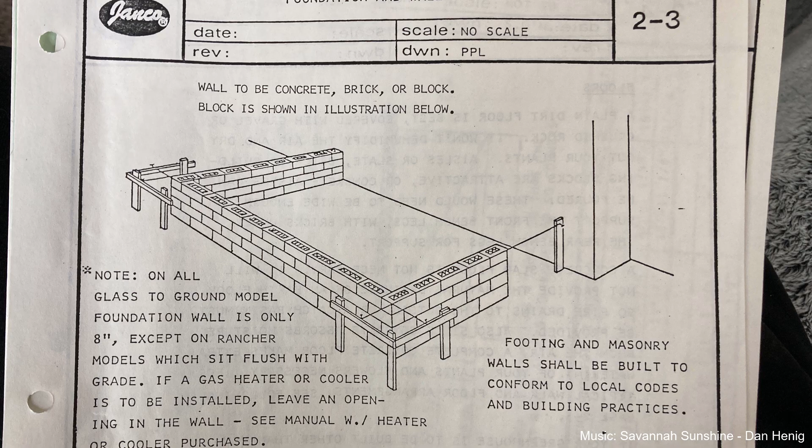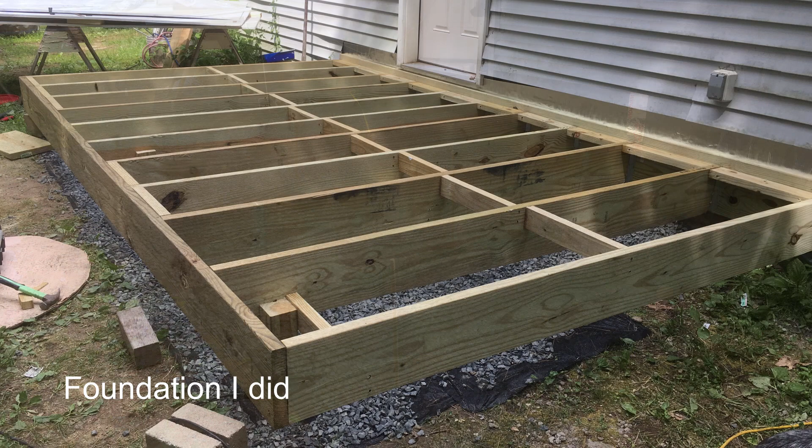The first thing we need is a foundation. The instructions required a poured concrete foundation, but the place I wanted to position the greenhouse had the water line underneath it, so that wasn't an option for me. So I went ahead with sonotubes and built a deck-like structure to mount the greenhouse to. I even got a little helper to help me.

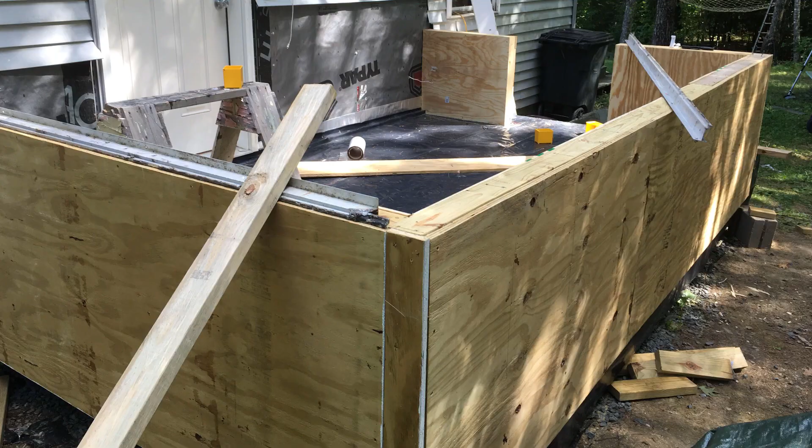I built 2x4 walls and insulated them with fiberglass insulation. I sealed that with tar paper, and I plan on vinyl siding it.

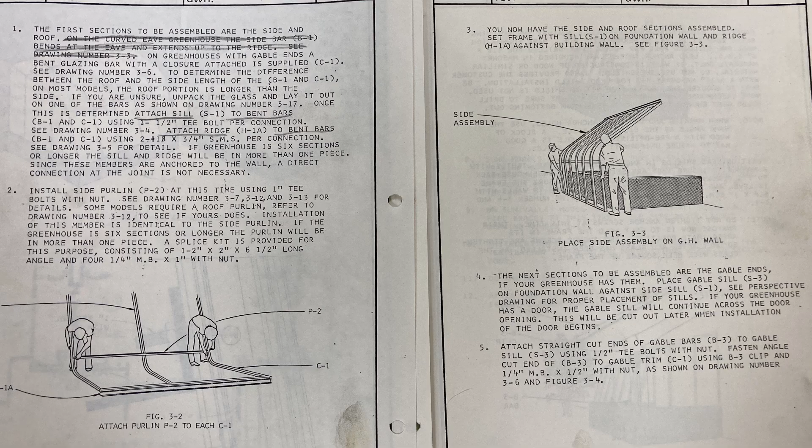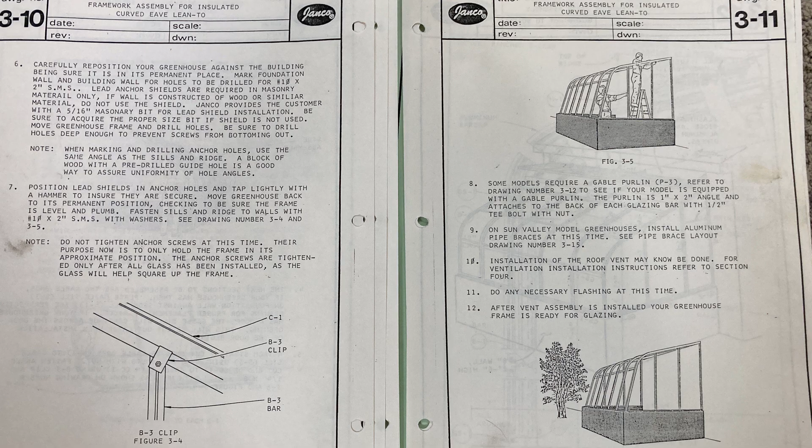Here's some of the important diagrams on how the actual structure gets built. Basically, the sill and top cap get screwed into the ends of the arced ribs. The arced ribs have a crossbar that connects them all, and then once you bring that up on top of the foundation, you square it and then secure it to the foundation.

Here are some important diagrams to show some dimensions. Once we did that, we were able to put in the side ribs and close in the walls with glass.

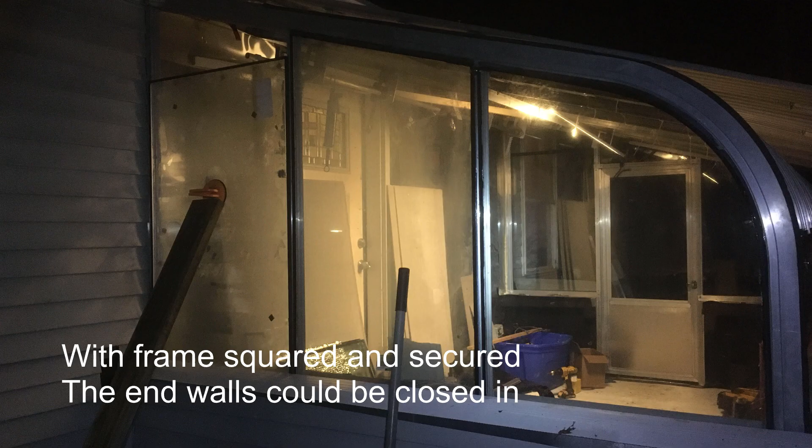So this is kind of neat. We've got a crazy storm here, and other than that one spot in the corner that I kind of made wet by trying to drain that lip there that I haven't fully turned up, it's completely dry in here. This is a crazy storm, it's actually picking up the corner of this temporary roof. It's a very strong wind we got going on here. But, I mean, bone dry in here.

So it's snowing outside, it's about 20 degrees out. I've got this heater running on medium, and that thermometer right there in the corner says it's about 55 degrees in here, so it's pretty comfortable, and it's at least warm enough to do this tile. So I'm now tiling.

And this is how it sat for the first winter. We actually even got to have Christmas in here.

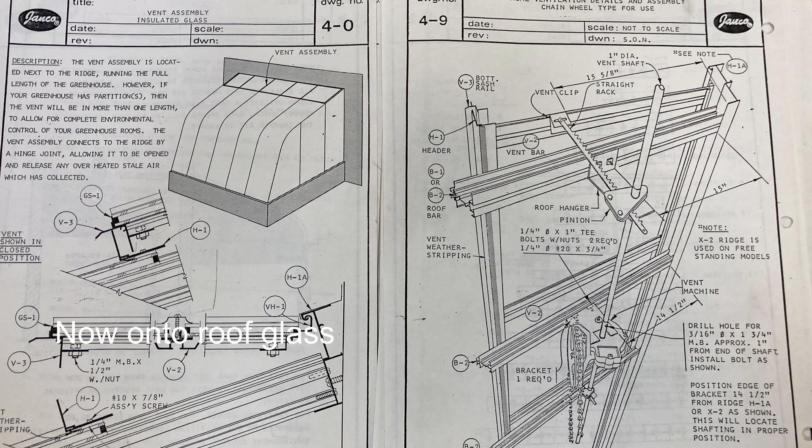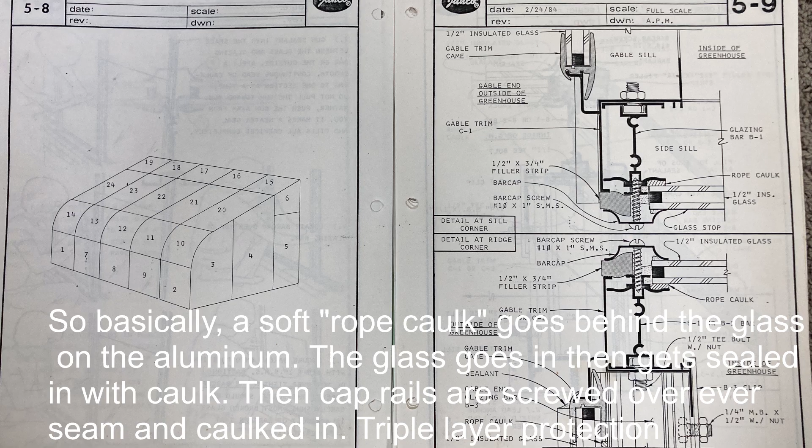Now it's on to the actual roof glass. Here are some diagrams that show how the vent hinges and how some of the glass is installed. Basically there's a soft rope caulk that's behind the glass that the glass gets set into. Then you caulk around the glass, then you install the cap rails, and then seal those cap rails in with more caulking. So it's basically 3 layers of sealant.

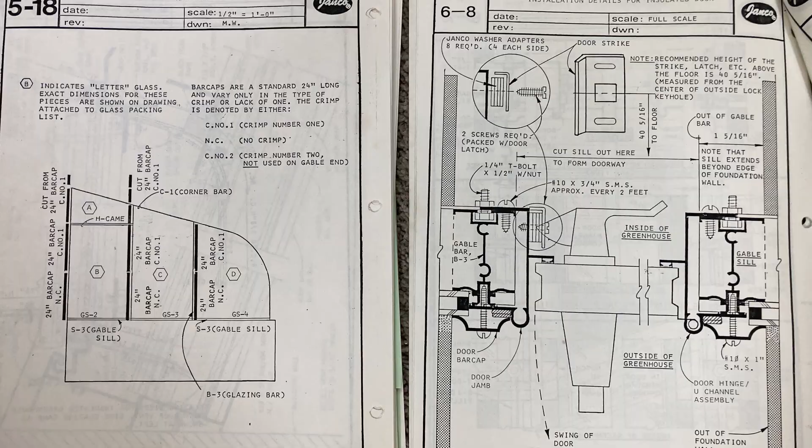Alright guys, so after getting the siding done, getting the glass in, I started doing the front glass, and I ran into an issue right off. About half of these curved pieces of glass were cracked, and these things are not cheap. They're hundreds and hundreds of dollars a piece, and you have to have them custom made at this point. So what I actually did is I grabbed some plexiglass from Lowe's, and believe it or not, I made these curved pieces of glass out of plexiglass.

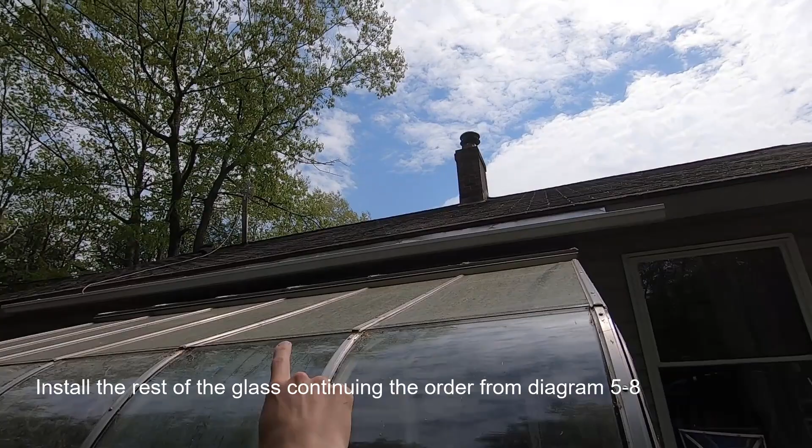You can see how this one's flexible, and they're about 1/10 of the cost of this glass one. And then lastly, I did the vent glass standing in the greenhouse, and then put the big pieces of roof glass up one by one through these holes.

Cat's favorite spot. We're starting some seeds here.

We did add a window in this wall so that all the light and even the heat can get through here into the living room.

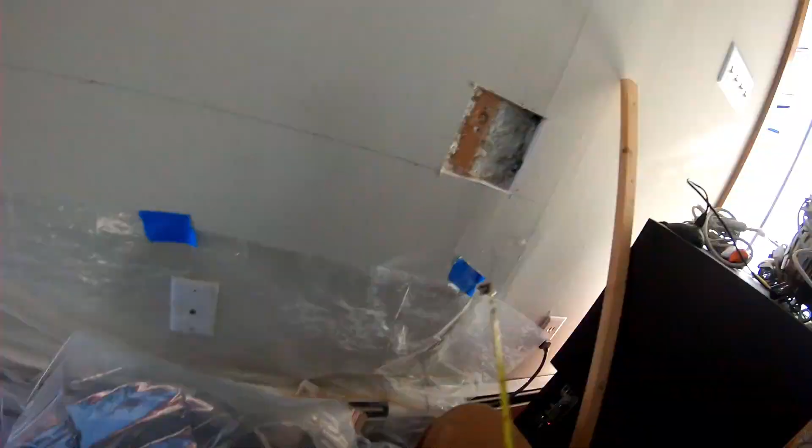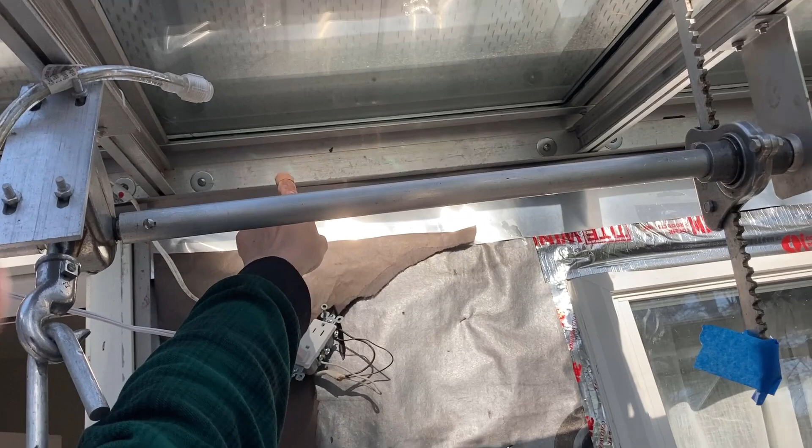It attaches to the house at the top here. And this vent goes all the way until it hits the roof here, and it's pretty fully vented. It just cranks open.

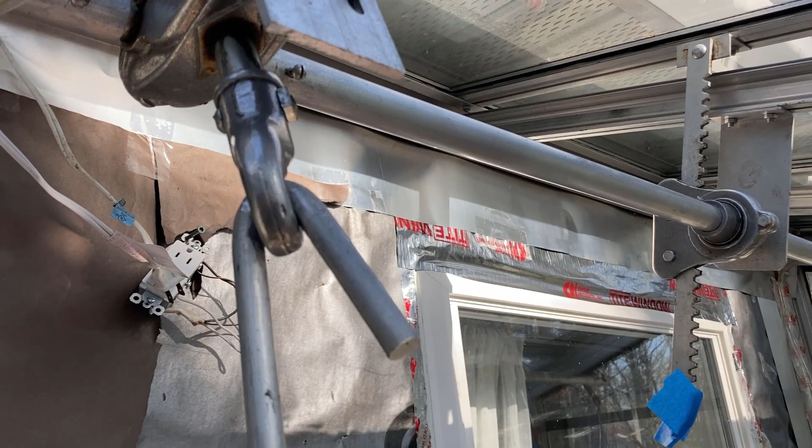What do you guys think? There was a lot of cleaning, it took a lot of work, but I think it added just as much value to the house. Spent a lot of time out here. You can cool it down in the summer by venting the skylight, and you can even heat it in the winter with a small propane heater. So really, we use this year round. It's definitely a great value.